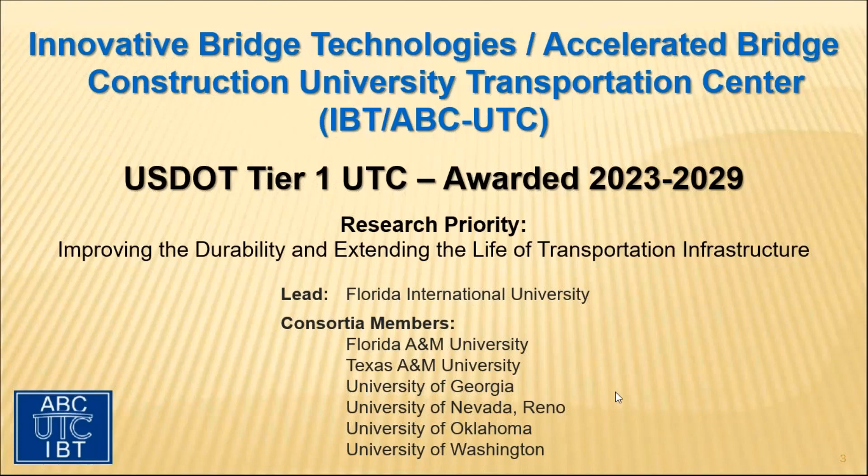As we've been discussing for the past few months, the ABC UTC will be transitioning to the IBT ABC UTC next month. FIU and our partners, as noted on this slide, have been awarded funding as a U.S. Department of Transportation Tier 1 University Transportation Center. With this transition, we'll be adding the IBT to our acronym to reflect our added focus on innovative bridge technologies. This is in addition to our focus on the accelerated bridge construction topics.

So what do we mean when we say innovative bridge technologies? Some examples are additive construction, such as 3D printing and automation, the next generation nature-inspired and advanced materials, also advanced information technologies, such as AI, ML, and AR. We'll also be delving into topics related to asset management and design specifications. Again, this is in addition to our ABC topics.

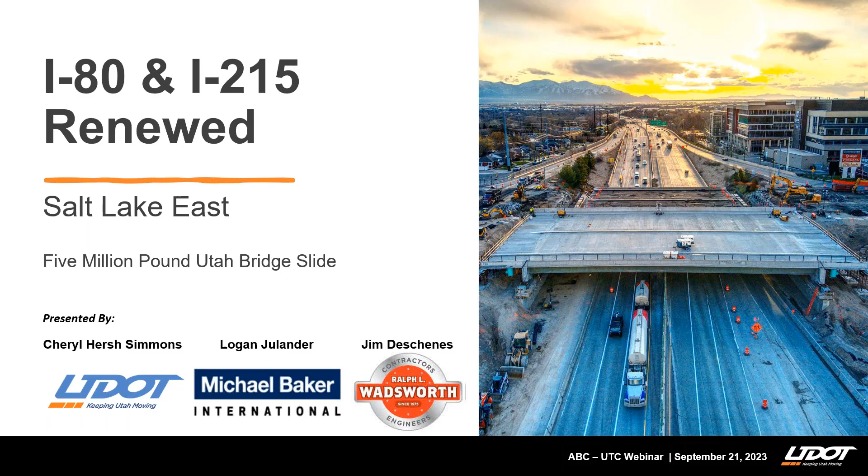Today, I'll start off by providing a high-level recap of Utah's Accelerated Bridge Construction Program history. Afterwards, I'll give an overview of the I-80 and I-215 renewed project and introduce the 5 million pound bridge. I'll then pass it over to Logan, who will focus on some of the critical design considerations, followed by Jim, who will dive into the construction details. We'll wrap up with lessons learned, followed by some time for Q&A.

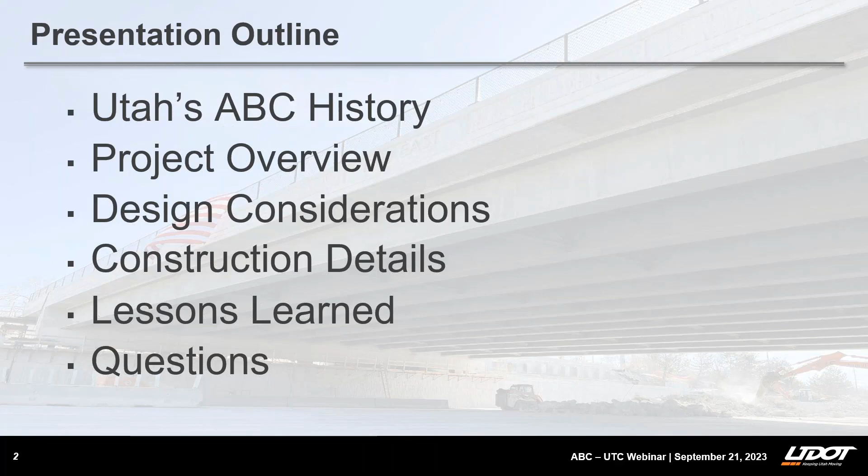So with that, I will kick it off by first starting with a little history. UDOT's first design build procurement was the $1.6 billion I-15 reconstruction of more than 16 miles of freeway and 142 bridges through the Salt Lake City metropolitan area in anticipation of the 2002 Winter Olympics.

It was vital that the project be completed before the games started, so the design build team chose several innovations new to Utah to accelerate construction, including the use of precast half-depth concrete deck panels and geofoam fill. The project was such a success, finishing both under budget and ahead of schedule, people started to ask why we don't do this all the time.

So, as a result, UDOT began research focused on innovations for accelerated project delivery. A portion of the research effort included scanning tours to investigate on a national level what other states were doing. In addition, a series of accelerated bridge construction workshops were conducted to engage industry, educate stakeholders, identify what was needed, and prioritize needs. In retrospect, the engagement of industry was a critical step to the success of the program and achieving the goal of having ABC as a standard practice.

It also led to a vision for a family of ABC methods and a plan for a programmatic implementation through pilot projects. Each pilot project set goals based on its specific scope and technology and provided strategic opportunities to gain experience. The first pilot project focused on prefabricated bridge elements and involved a bridge over I-80. The project was a deck replacement using full-depth precast concrete deck panels. It was designed internally by UDOT and constructed in 2003 using design bid build. The limitations of operations offered the contractor incentives and required the bridge to be opened in 7 days. The contractor received the full incentive.

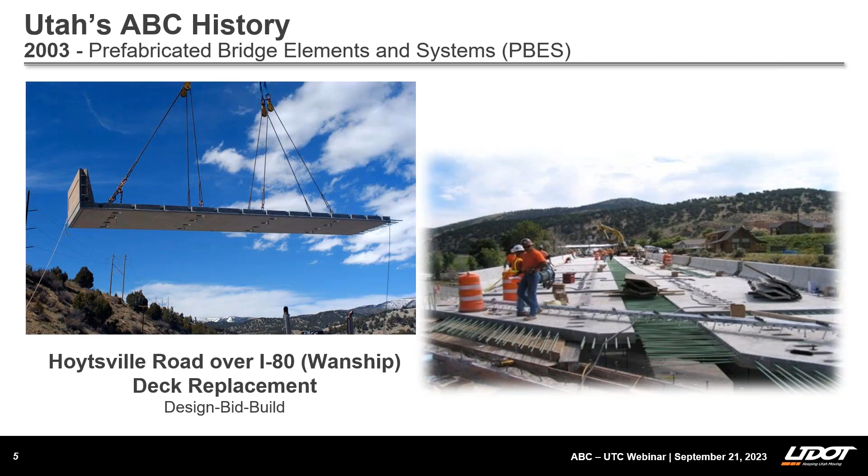In 2007, UDOT used self-propelled modular transporters for the first time to replace a bridge carrying 4500 South over I-215, not far from the project we'll be talking about today. Since the project involved a new technology, high risks, and a compressed schedule, a construction manager general contractor, or CMGC, contract was used to bring the designer and contractor together early in order to reduce risk and improve constructability. The bridge was replaced in 1 weekend. It took 7 hours to remove the 2 existing structures and 8 hours to place the new structure.

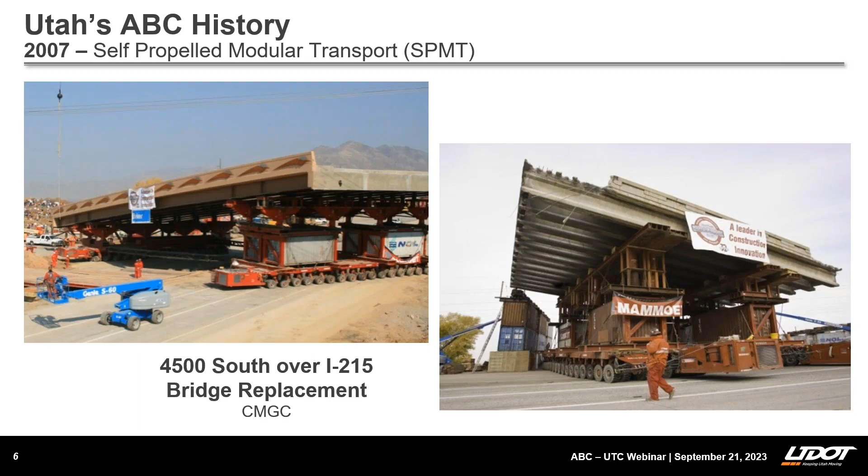In 2009, the bridge replacement for SR 66 over the Weber River was the first project specifying the new bridge be constructed parallel to the existing structure and then slid into place. The original design specified rollers, but the contractor performed a value engineering analysis and slid the bridge on Teflon pads with a hydraulic system. 30 days of closures were allowed in the contract. However, the contractor was able to complete the work in just 7 days.

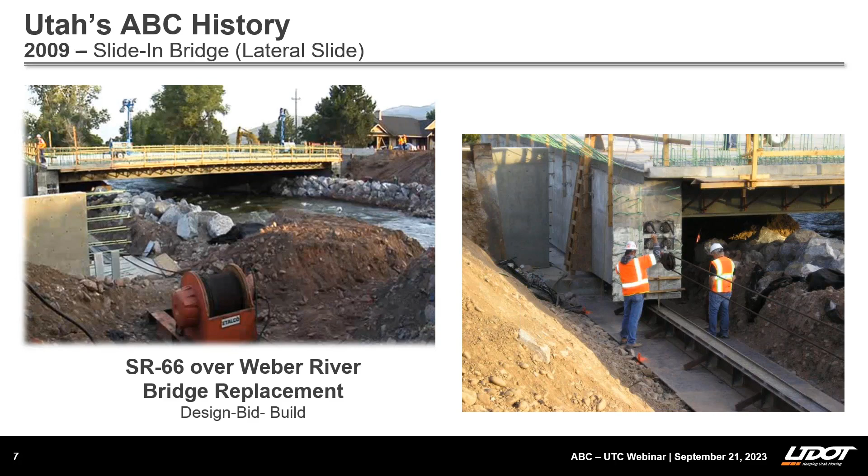We've established standards based on lessons learned and national research. We continue to evaluate performance and improve design criteria, design details, checklists, and construction specifications to give guidance and ensure consistency. This has been significant for designers, reviewers, construction inspectors, and contractors. With clear expectations, we are able to allow for innovations to meet site-specific goals.

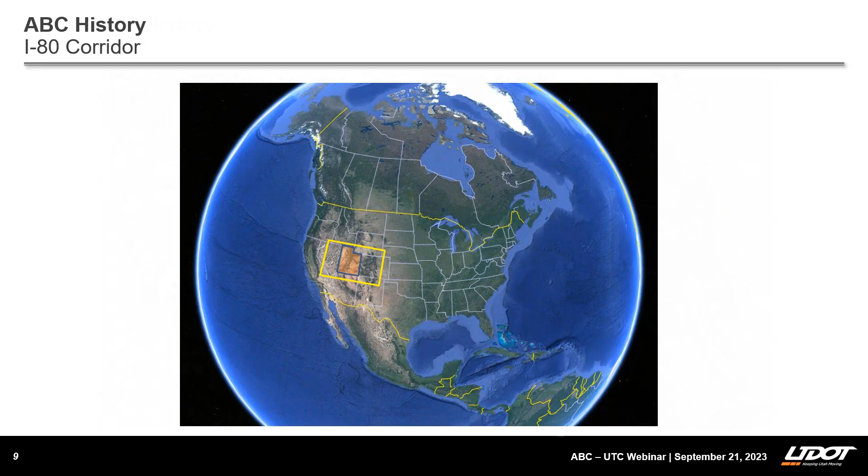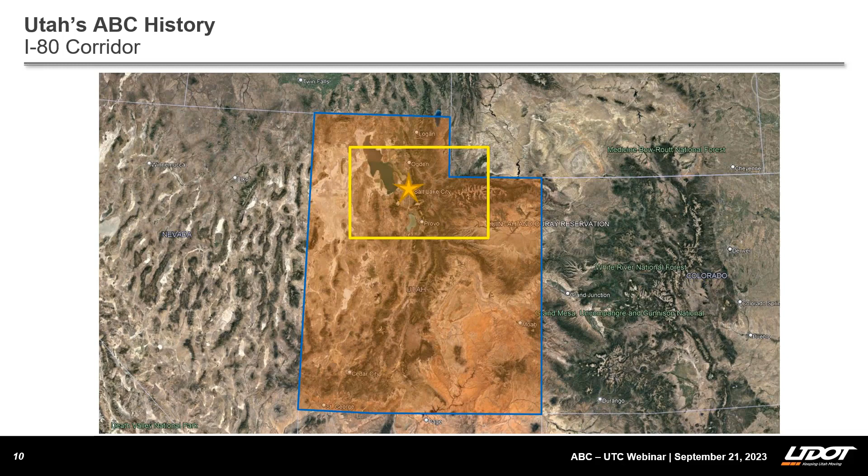Now I want to spend a minute getting everyone oriented. Here's a view of Utah, which sits in the western part of the United States. We'll be focusing on the northern part of the state near Utah's capital, Salt Lake City, which is designated by a star. A significant number of Utah's ABC projects, including some I've already mentioned, have been concentrated on I-80 and I-15, which provides a crossroads to the state. In addition, I-215 forms a belt loop with I-80 in the boxed area. The average annual daily traffic on these key economic corridors provides an obvious reason why minimizing disruptions to traffic is critical, and ABC is a popular solution.

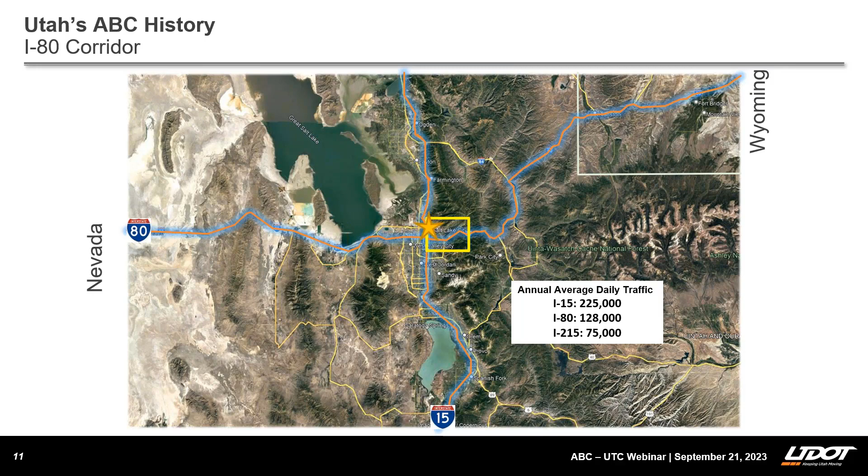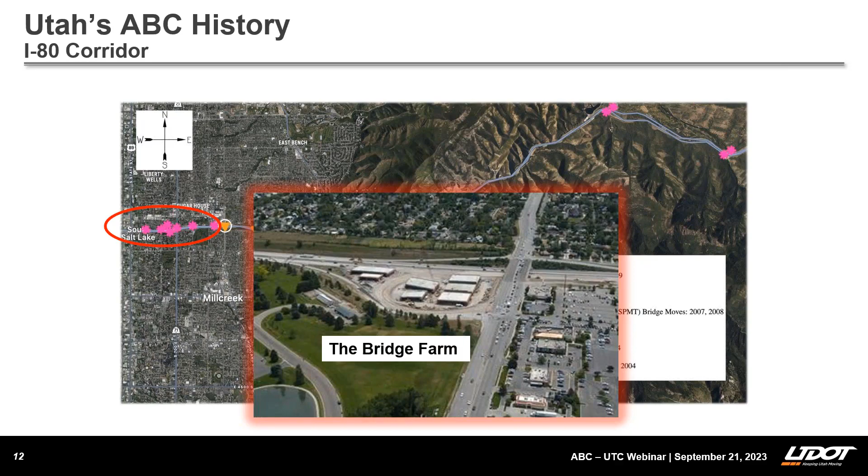Now let's take a closer look at the I-80 corridor near the junction with I-215. This slide shows some of the bridges in the area that have previously used ABC methods and elements, including lateral slides, SPMTs, and prefabricated bridge element systems. In fact, one of the more notable ABC projects happened in 2008. The project included 7 bridges that were moved into place using SPMTs. The space within the loop created by the 1300 East on-ramp to I-80 westbound was used for the construction of the bridge superstructures. It was coined the Bridge Farm. The I-80 and I-215 Renewed project we're discussing today begins just east of where that project ended.

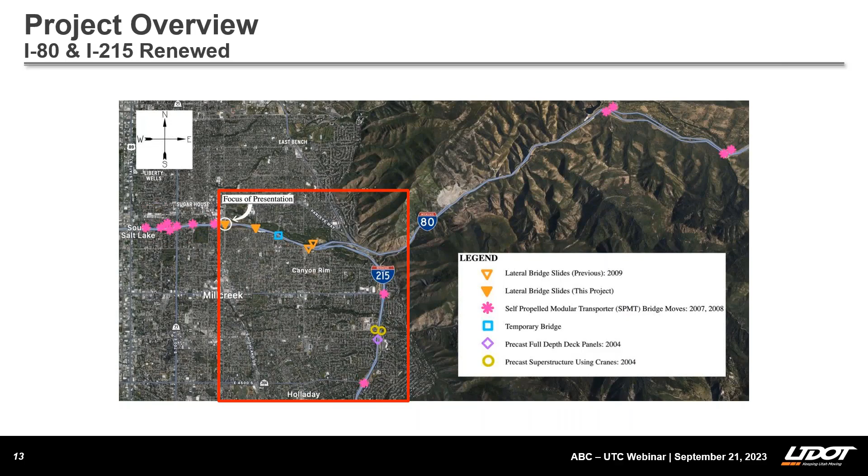This view of the project area shows the location of the 1300 East Bridge in the upper left corner in the white circle. It also highlights the key items of work for the project, including concrete pavement removal and reconstruction, a new eastbound lane on I-80, 4 replacement bridges, and 2 bridge widenings. The project value was over $120 million and used design build for project delivery.

One of the project goals was to maximize mobility during construction. The project used a best value selection with a combination of the proposal technical score and price. The proposer's schedule, user impacts, and road closures impacted the total. There was a maximum closure time allowed for each road with an associated cost per day.

For example, 1300 East allowed a maximum of 21 closure days with a cost of $100,000 per day for each full closure. On weekends, I-80 eastbound at 1700 East had a $150,000 cost per day for a full closure, with a maximum number of 12 off-peak closure days allowed.

The project was awarded in 2021, and the selected contractor proposed to use lateral slides for the replacements of both the 1300 East and 1700 East bridges over I-80, and a temporary bridge to facilitate phased replacement of the 2 bridges carrying I-80 over 2000 East. 1700 East was slid in 2022, and 1300 East was slid in April of this year.

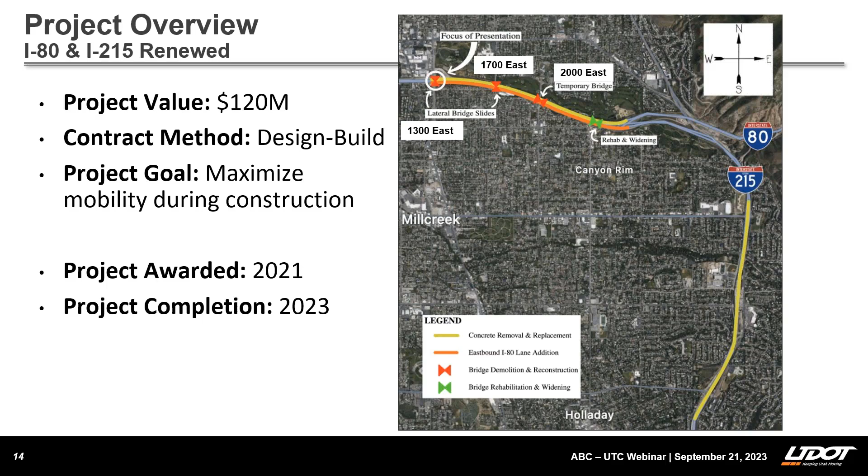The remainder of this presentation will focus on the 1300 East bridge replacement, otherwise known as the 5 million pound Utah Bridge Slide. So now we'll look at an elevation view of the 1300 East Bridge before replacement. It's a 4-span pre-stressed concrete girder structure that was constructed in 1964.

One thing to note is that UDOT has performed lateral slides with and without the approach slabs attached. For this project, the contractor opted to slide the 1300 East Bridge with its approach slabs. More details on this will be covered as we move on in the presentation.

Now, I'll turn it over to Logan. Hi, I'm Logan. I'll go over some of the design considerations for the 1300 East over I-80 bridge. The 1300 East Bridge was 125 foot wide by 173 foot long with 25 foot approach slabs. The bridge was slid with the 25 foot approach slabs attached.

The superstructure weighed approximately 5 million pounds, and some of the material choices that helped minimize that weight were steel plate girders and lightweight concrete deck, sidewalks, curbs, approach slabs, and end diaphragms. This was all supported on full height spread footing abutments.

This slide now shows the cross section of the bridge and just how wide it is. The 1300 East Bridge carries 3 northbound lanes and 2 southbound lanes with 2 turning lanes onto the I-80 on-ramp. There's a 6.5-foot sidewalk on one side and a 17-foot shared use path on the other.

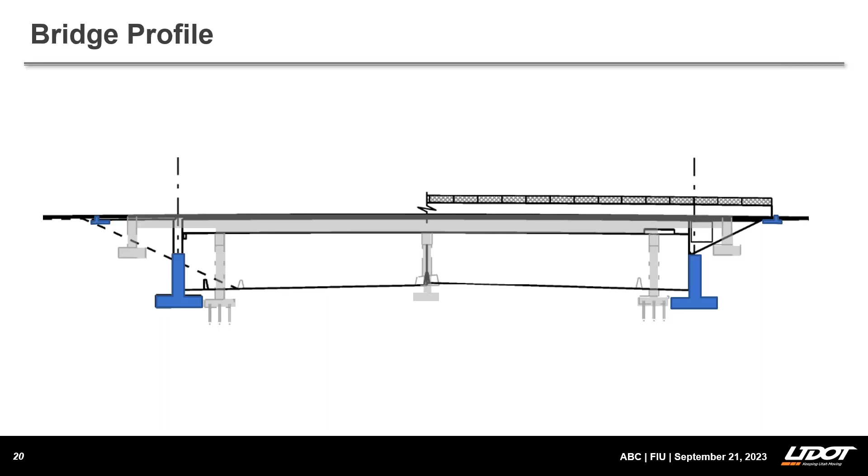The superstructure was slid on the abutment with the approach slabs connected, and the approach slabs were supported at the ends on transition elements that UDOT refers to as sleeper slabs. And I'll talk more about those later.

Now this shows the abutment in elevation with the temp support, and a common temporary support for bridge slides are driven piles with a top support beam at the slide plane, as shown here as an example. However, the temporary support for this bridge was essentially an extension of the abutment spread footing. The permanent abutment is shown in blue. Oops. And the temporary support is shown in orange. Having similar substructures reduced the risk for differential deflection between the permanent and temporary abutments.

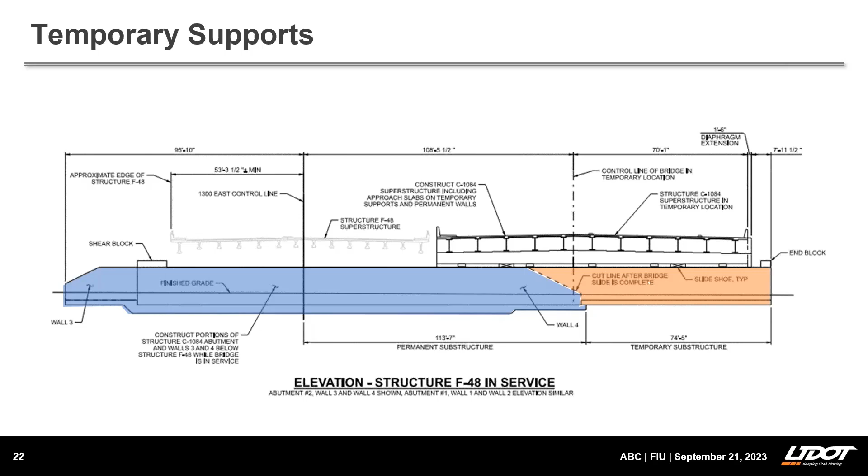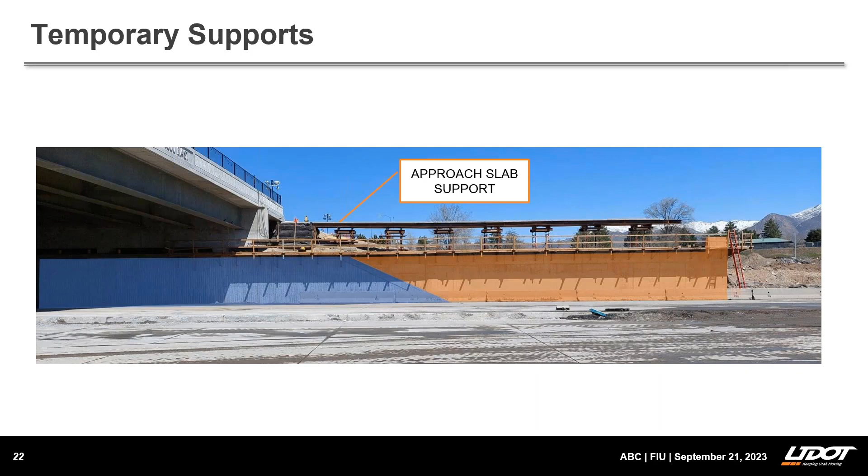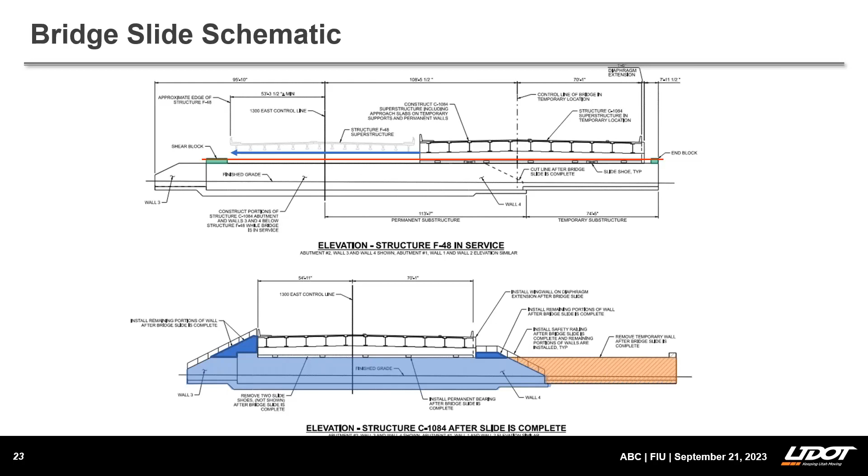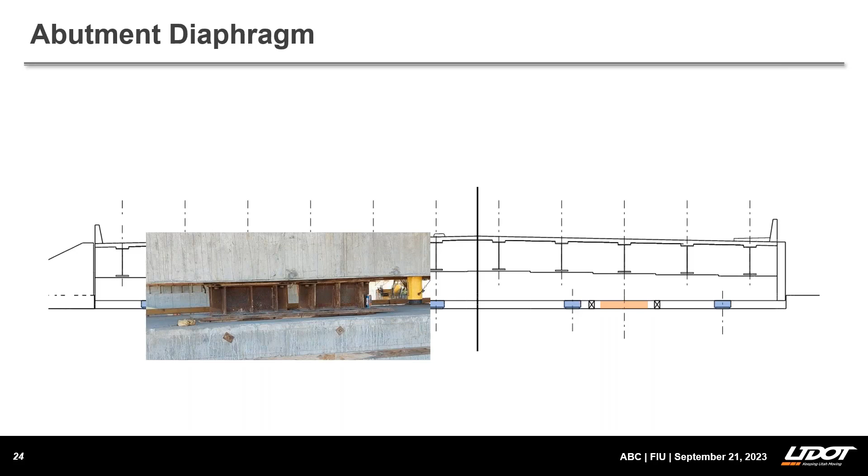Now, the abutment diaphragm was designed for different loading scenarios during the slide and in the final condition. The orange blocks indicate the slide or skid shoe locations that the bridge was supported on during the move, and this picture shows the slide shoe used for this bridge. The blue rectangles are the final bearing locations, and it was decided to use 2 slide shoe locations so that each shoe would have constant pressure during the bridge move, as opposed to several locations where you could have a shoe take more load than the others or have no load at all due to minor variation in the slide surface.

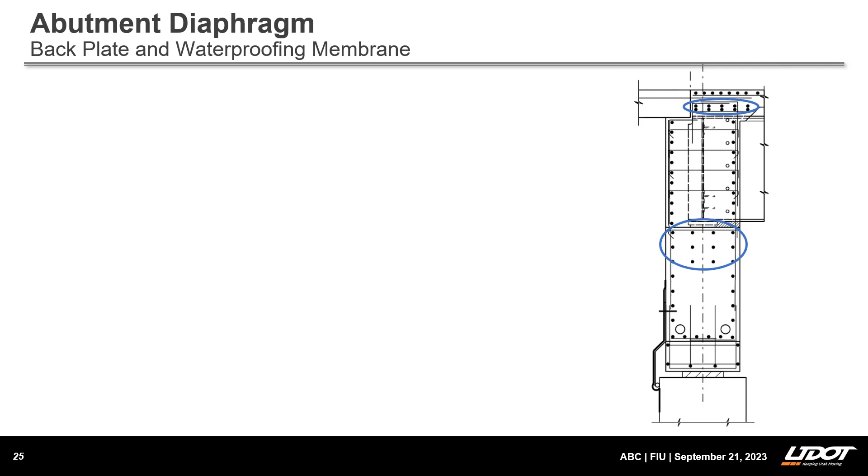This, however, placed the slide shoe locations 69 feet apart, which produced some large positive and negative moments in the end diaphragm. So the end diaphragm was essentially designed like a pier cap. This is another reason that the tall end diaphragm was helpful in design. And this section shows that 11-foot tall end diaphragm with the additional reinforcing below the girder and in the deck. You can see the 2 conduits that the threaded rods pass through highlighted in orange.

After the bridge slide, there was a 1-foot 6-inch gap between the top of the abutment stem and the bottom of the end diaphragms. The picture on the left shows that gap with the actual bridge. Now, in order to close this gap, a 3/16-inch bent plate was attached to the end diaphragm, as shown in green. This provided allowances for temperature movement and was sufficiently rigid to retain the lightweight cellular backfill.

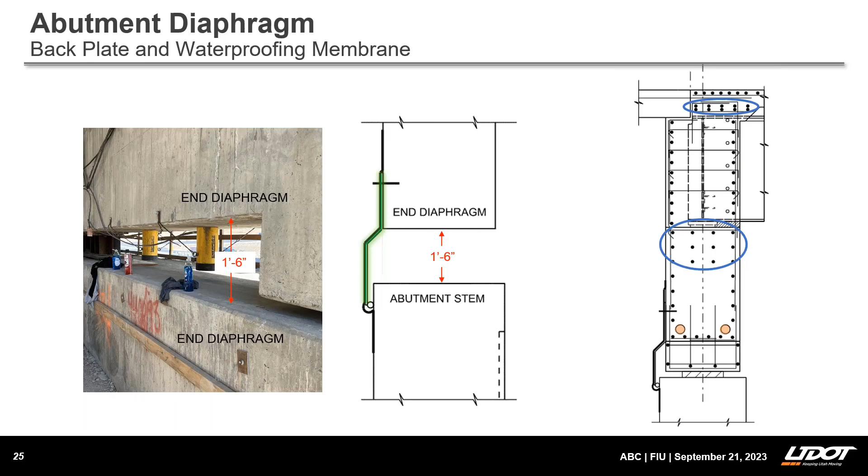So this provided 5 inches of clearance from the end of the approach slab to the post-installed stem bar reinforcing during the slide, and then approximately 1 inch of additional tolerance for setting the joint after the slide. Additional clear cover to the top reinforcement was provided to allow for grinding to account for any vertical differences.

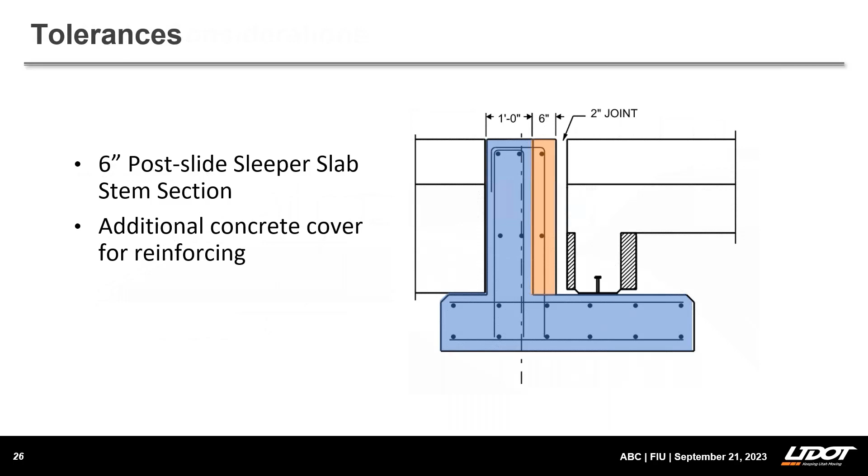Now, often bridge slides have unconventional details, but at the end of the day, we want the bridge to look like one homogeneous structure. It takes some forethought and design to help the bridge look aesthetically pleasing. A couple of aesthetics considerations for this bridge slide were the form liner, post-slide installed wing wall sections, and shear keys above the slide plane. Also incorporating a 7-foot by 7-foot city logo on a wing wall that could be seen from I-80 below.

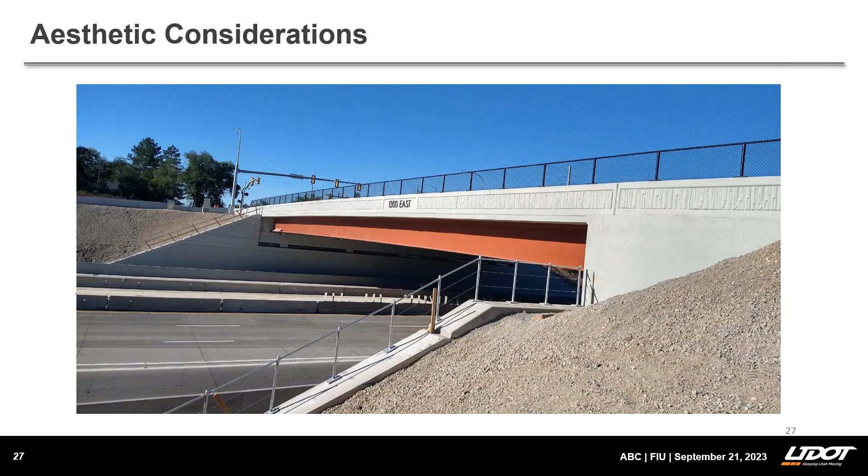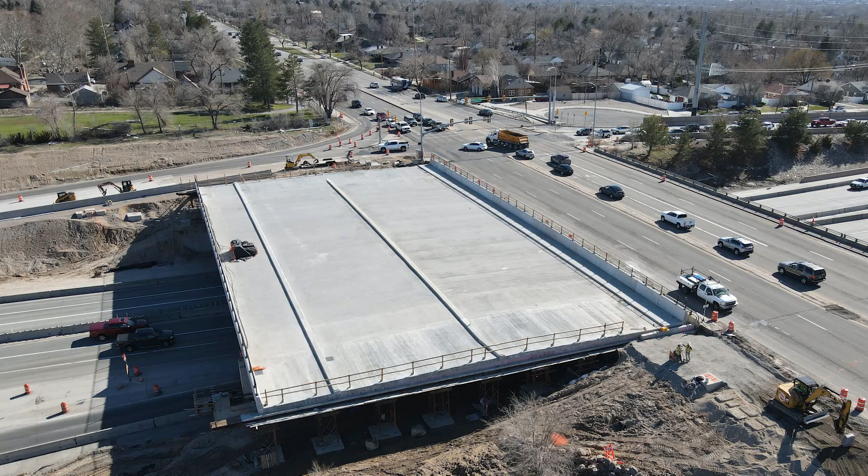My presentation is going to be focused around a time-lapse video of the 48 hours of the bridge slide itself. But I wanted to start out by saying the bridge slide was not the ultimate goal for the project. The goal for the project is really to provide a long-lasting maintenance-free bridge for UDOT. The purpose of using the slide was to replace an existing structure with the least impact to mobility as possible.

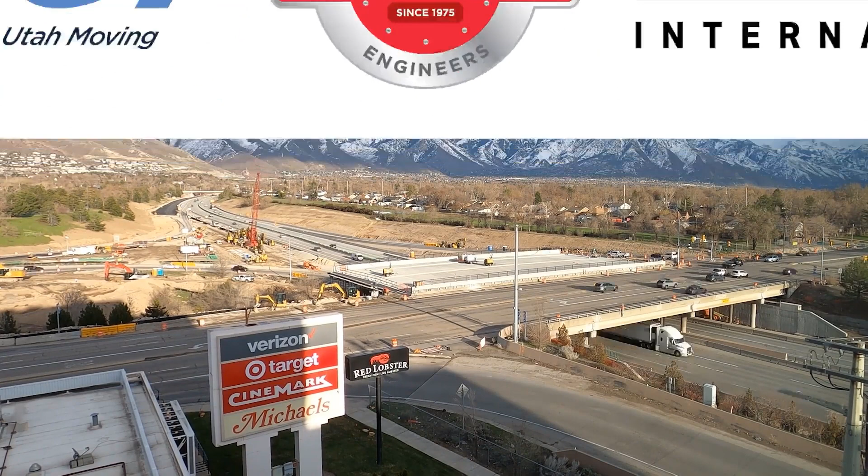That being said, there were a number of factors why a bridge slide made sense for our team in this location. One major factor is we've executed 10 similar bridge slides, most of them with UDOT and most of them with Michael Baker design engineers. That experience from all parties is critical in achieving the project goals and providing a high quality, low maintenance structure.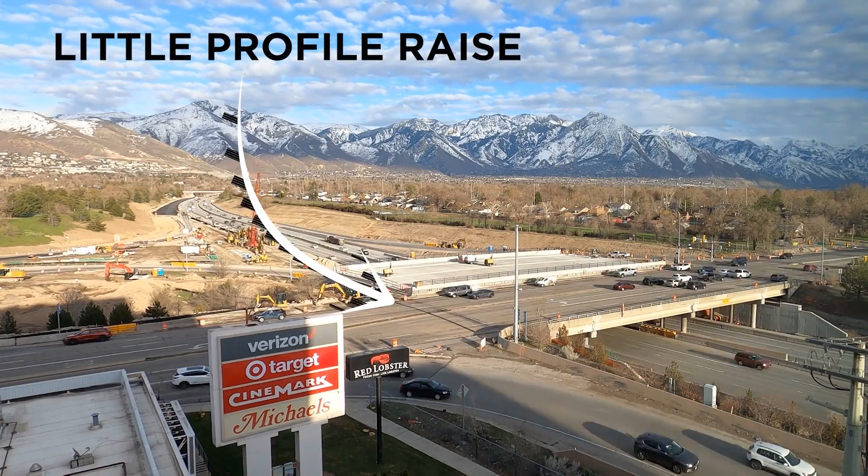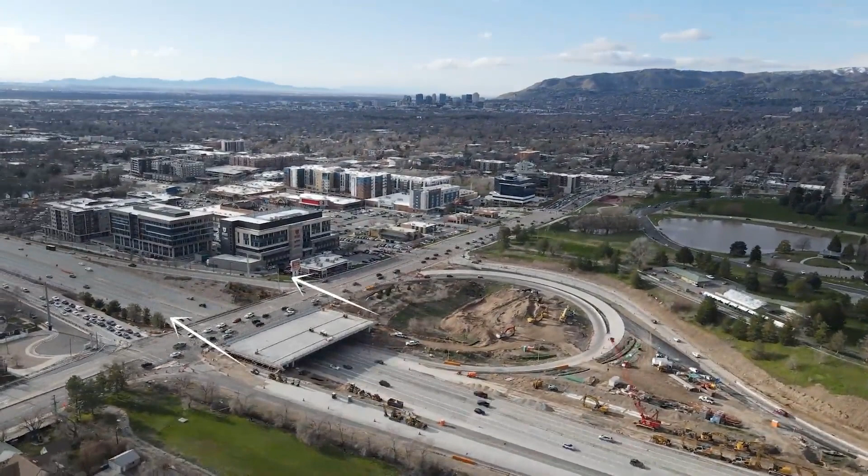Another factor is there was only a small profile raise from the existing roadway. Profile increases of more than 12 to 18 inches significantly impact the amount of roadway approach work that takes more time than the bridge slide itself. This bridge has basically zero skew. Let that catch up. Which made it really easy to control the alignment and design the slide system.

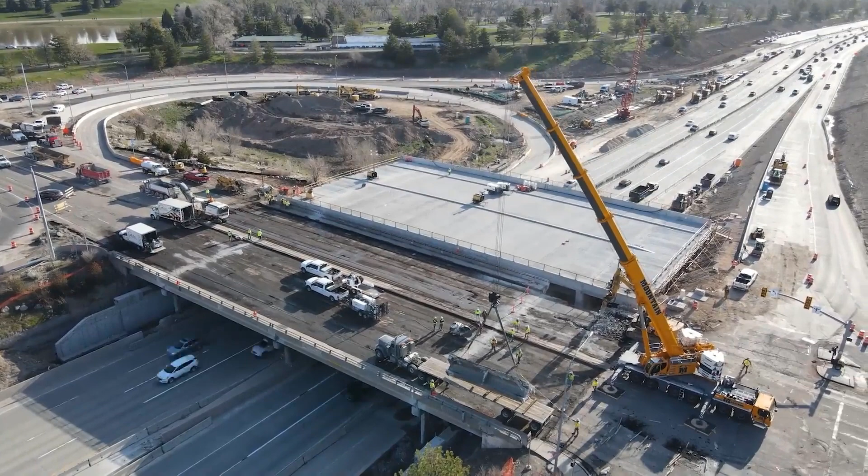Another factor is there's plenty of available space to build the bridge in a temporary location before executing the slide. Being able to build the bridge in a single phase in a temporary location has many advantages, including only closing the freeway for one night to set all girders instead of a multiple night closure for each traditional phase construction phase. Other advantages include no cold joints at the deck closure pours and an increase in safety for our crews as they are physically separated from traffic.

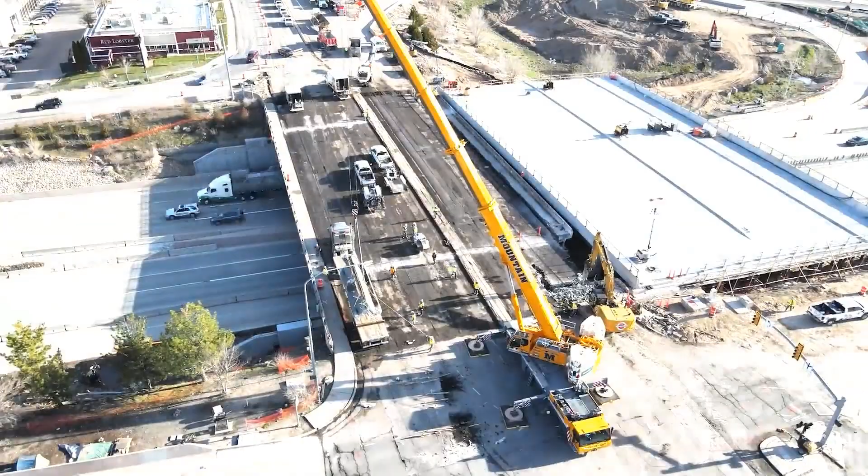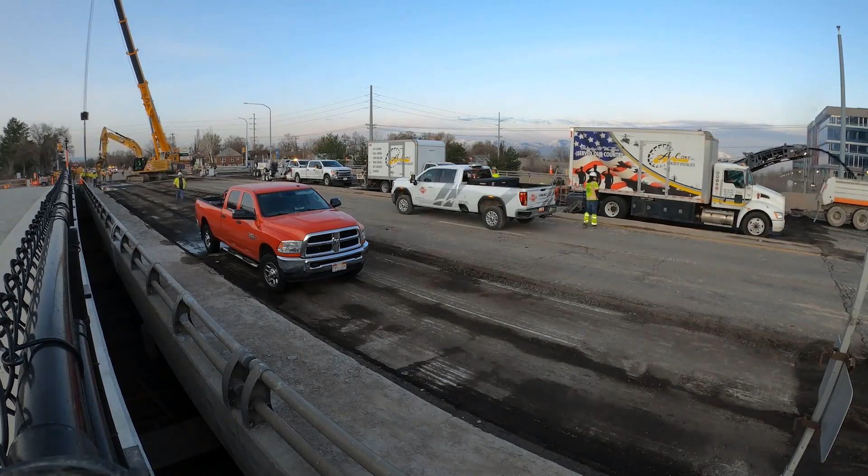A major task in any bridge slide is the demolition of the existing bridge. And as you can see, the new bridge was only 2 feet away from the existing bridge. The first step for this bridge was milling the existing overlays. This was done while freeway traffic was still open beneath the bridge. Milling allows us to recycle the asphalt and reduce the amount of material we have to process when the existing bridge is demolished in place.

For this existing 4-span bridge, we saw cut the deck and removed the end spans without closing the freeway. The end spans were short and relatively light. The large sections were hauled off to be processed in our yard, saving time to demolish these spans once the freeway was closed.

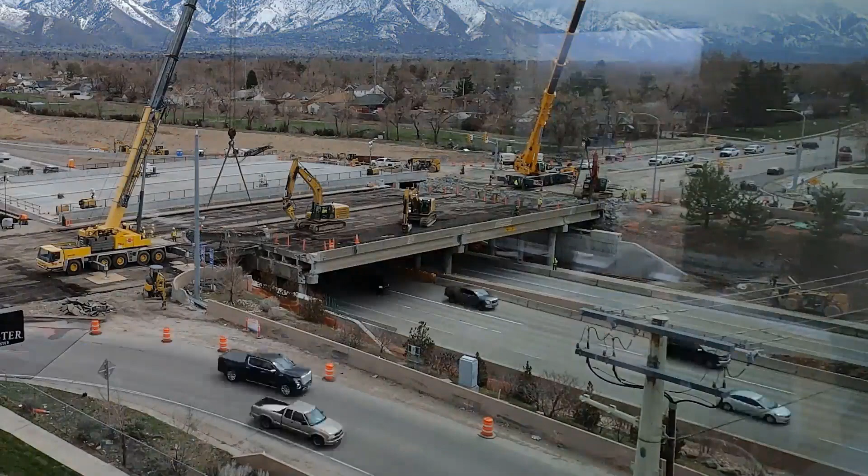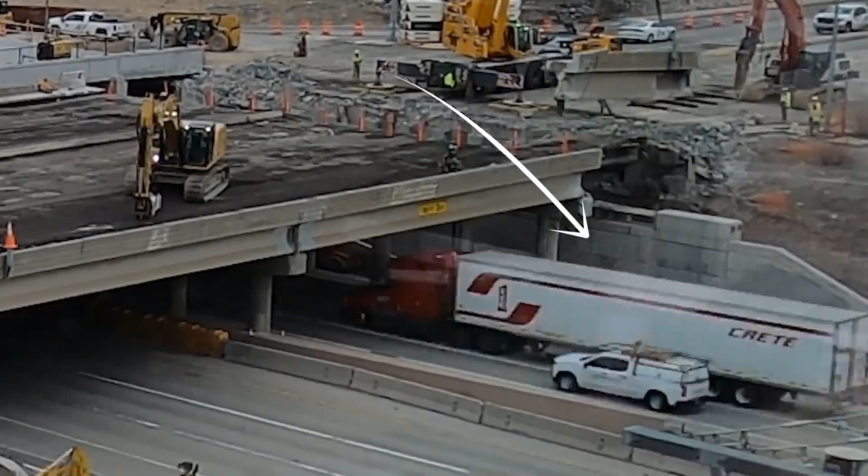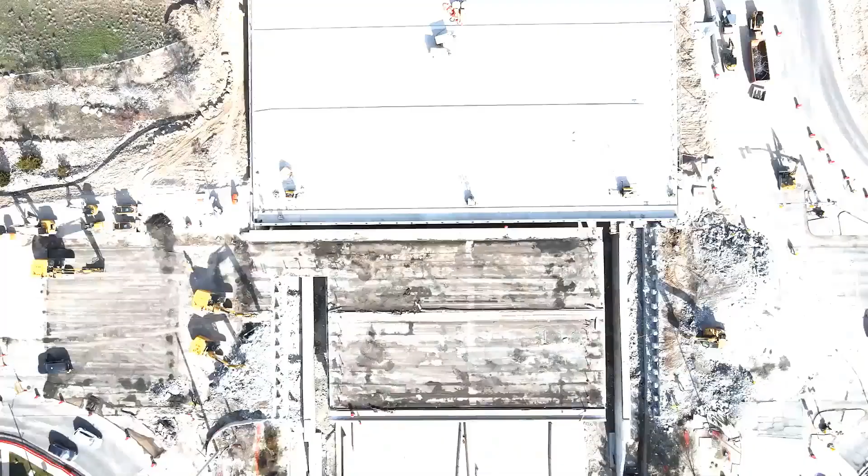A key component of the bridge slide is having space to build the new substructure under the existing bridge. In this case, the new abutment and slide surface was under the end spans of the existing bridge. A controlled removal of the end spans allowed us to prepare and protect our slide surface and install the post-tensioning rods we used to move the bridge before demolition was complete. As you can see in the video, we left one section of the end span in place to access the demolition of the main spans.

The analysis of the existing structure and the demolition plans were provided by RLW engineers. The actual demolition is one of the more action-packed nights of a bridge slide and makes for great video, but the reality is it's really a long night of noise and dust. We'll speed up through the demo here and use this opportunity to talk about our schedule.

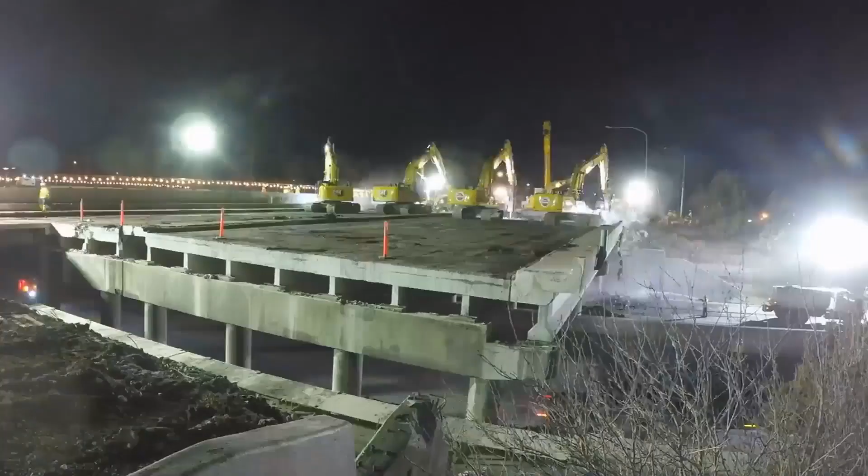Our planned schedule was to close 1300 East on Wednesday evening at 4 p.m. As we just saw, we started with overlay milling and the end span removals. We also started roadway approach work and drainage utility work. We closed I-80 in both directions on Friday night at 10 p.m. and began demolition of the main spans, the longest activity duration of the weekend.

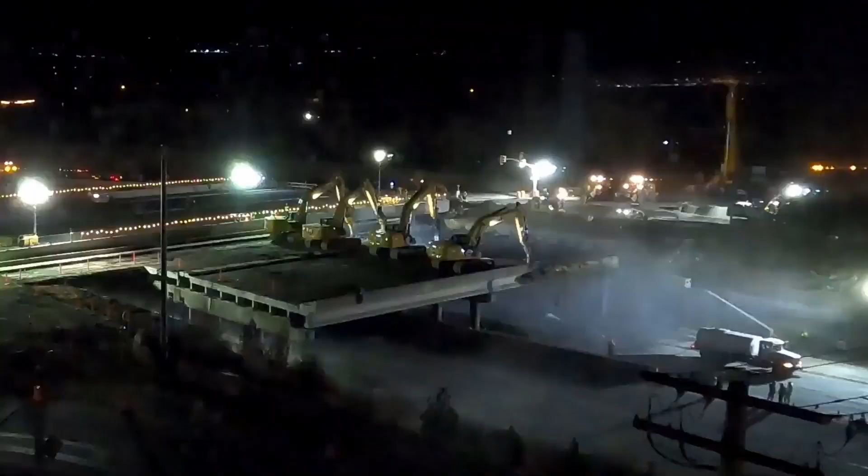The actual bridge slide was scheduled for 6 p.m. on Saturday and was planned for 10 hours to be completed by 4 a.m. Sunday morning. The remaining tasks were final cleanup of I-80, resetting the highway barrier, and a bridge inspection by UDOT before we opened the freeway to traffic. Conservatively, we had planned on an opening of Monday morning by 6 a.m.

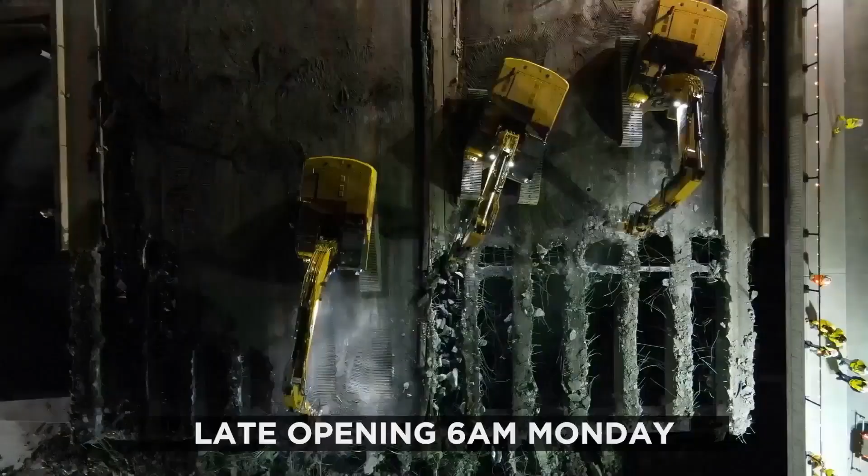We started the actual slide about an hour early at 5 p.m. on Saturday and finished in just under 7 hours. We were able to reset the barrier, do a partial inspection, and open I-80 by 3 p.m. on Sunday. The total freeway closure was just under 42 hours. Here at the end of the demolition, you can see that utility and roadway work is underway at the ends of the bridges.

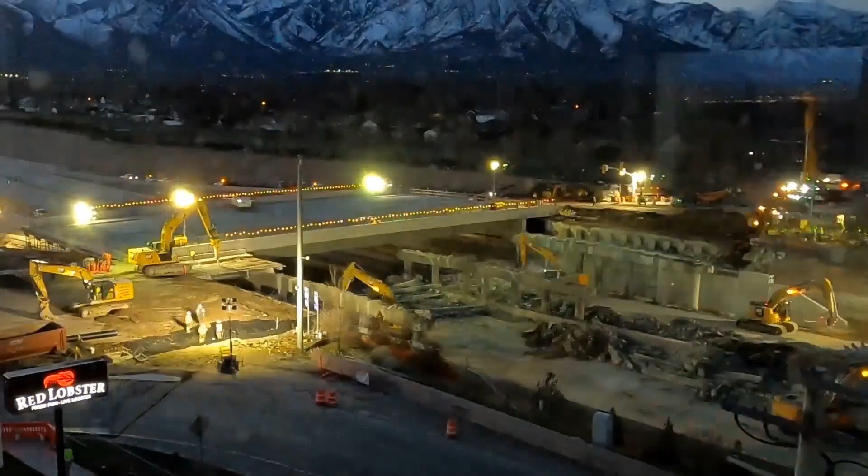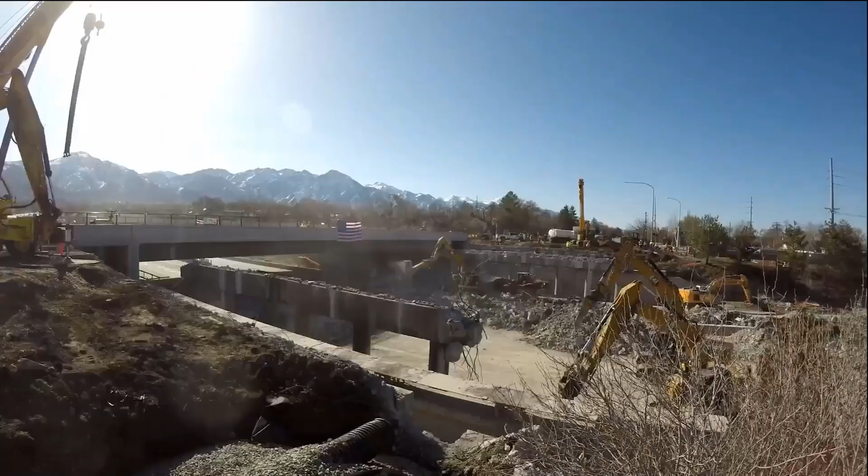Moving down to the freeway level, this view shows where the new abutment is constructed between the existing pier and the abutment of the existing bridge. And from this view on Saturday morning, you can see more of the elements critical to our bridge slide. From this angle, you can see the new abutment and its location between the existing pier and abutment, and you can also see the new abutment and slide surface being protected by timber and plywood as we finish the demolition.

One critical component of our bridge slide was sliding the approach slabs along with the bridge. UDOT uses sleeper slabs at the ends of the approach slabs as Logan described earlier. Therefore, before we slid the bridge, we had to set and level precast sleeper slab sections. Here we are setting the precast sleeper slab sections, which sets up our transition to the actual bridge move.

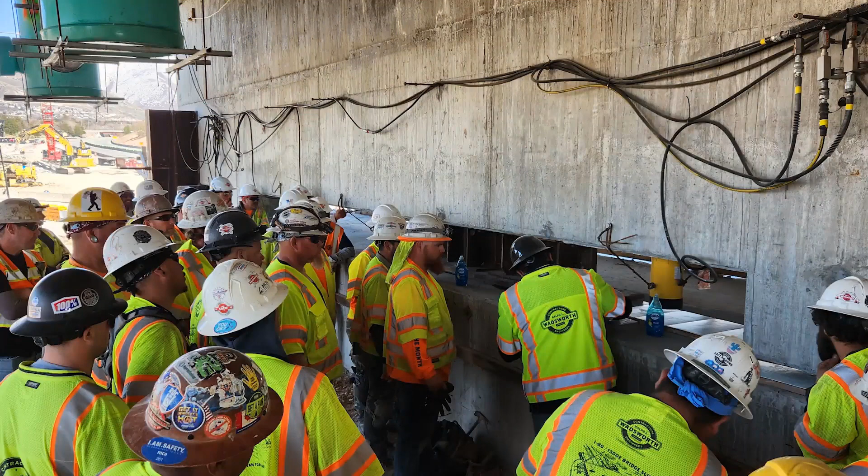We'll take a break from the video here to talk about some risk mitigation we implemented on the project. The first mitigation was having a number of pre-activity meetings. As you can see, we had a number of people involved and we had to coordinate our efforts. Some of our crews had been present during past bridge slides, but we really needed to get everyone clear on their roles and responsibilities for this particular slide.

Survey was also critical to a successful bridge slide. We performed multiple surveys of the slide surface, slide shoe elevations, and final pedestal elevations prior to sliding the bridge. We also performed deflection analysis of the end diaphragms as the support locations were different during the slide than they were in the final position. Although deflections were small, they were measurable, and we needed to have a complete picture of the as-built bridge pedestals and as-built abutment bearing location elevations to make sure that they would work with the final bearing pads to achieve the critical vertical tolerances.

Another aspect of the move, as you will see in a minute, is that when we were moving the bridge, the workers at the abutments placing the slide pads for the bridge and monitoring the progress are under the approach slab and out of sight of the jack operator who is up on the deck controlling the hydraulics. To overcome the line of sight and communication problems, we set up a series of video cameras and had a monitoring tent on the bridge.

As you can see in this photo, we had cameras at the leading edge of the bridge deck looking down at a survey stake and metal tape at the center line of the abutment. We also had cameras watching the hydraulic jacks. The hydraulic jack operator could watch the bridge move longitudinally and laterally with every stroke of the jack. This was critical to keep the bridge aligned during the move.

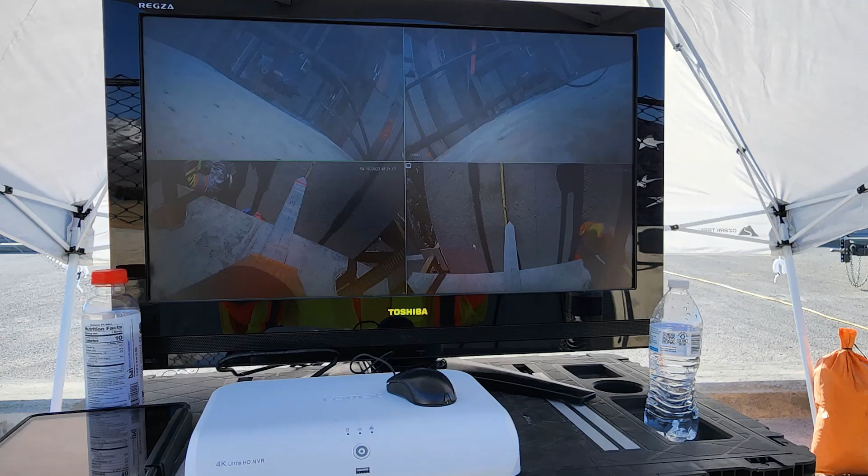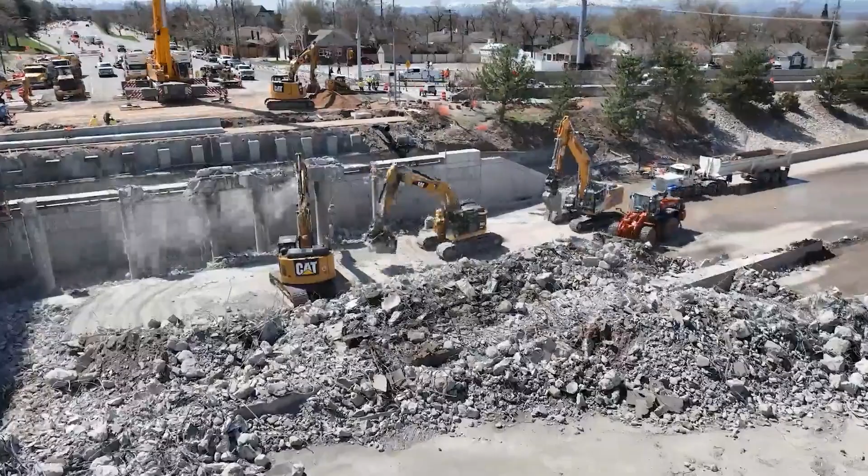Moving on to the actual bridge slide, we used two 200-ton hydraulic rams, one at each abutment. The bridge was slid on PTFE bearing pads lubricated with dish soap. Each abutment was slid on removable slide shoes. Once the bridge was in place, we lifted the bridge, removed the slide shoes, and set it down on the final bearing pedestals. Each abutment sits on laminated elastomeric bearing pads in 5 locations. To accelerate our schedule, we started moving the bridge before demolition and cleanup was complete.

One key aspect of our move was sliding the approach slabs with the bridge. One innovation we used to accomplish this was to use PVC catch basins that we could pre-install into the approach slabs. The lightweight allowed us to suspend them from the approach slab using typical pipe hanger hardware, which would not have been possible with concrete catch basins.

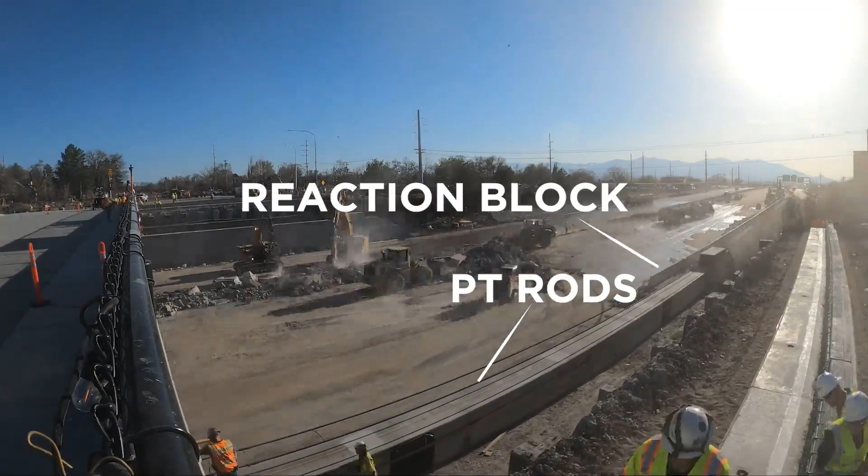In this view, you can see the camera attachment frame and survey stake at the leading edge of our abutment. You can also see the steel frame that served as our lateral steering guide for the bridge. I'll talk about that in a few minutes. As you'll see in these next portions of the video, the ends of the approach slab, the sleeper slabs, the reaction blocks, and the PT rods that were used to move the bridge.

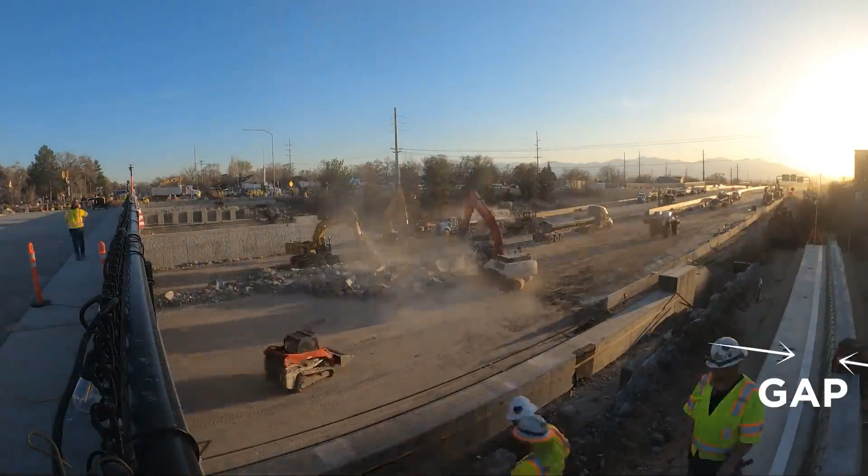The critical alignment area is between the approach slabs and the sleeper slab stem wall. It's critical to keep the gap constant and not bind the bridge against the stem wall. In this case, as Logan noted earlier, we created a larger gap during the slide by holding back the stem wall concrete. This provided an extra 2 inches of lateral tolerance during the slide.

This view is from the south abutment showing our leading edge survey stake along with the PT rods and reaction blocks we used to move the bridge. Moving under the bridge, you can get a good view of the reaction blocks and PT rods. As we pan around, you can see the permanent concrete pedestals on the abutment stem. These are where the final bridge is supported, but as shown earlier, they are not being used as supports during the slide.

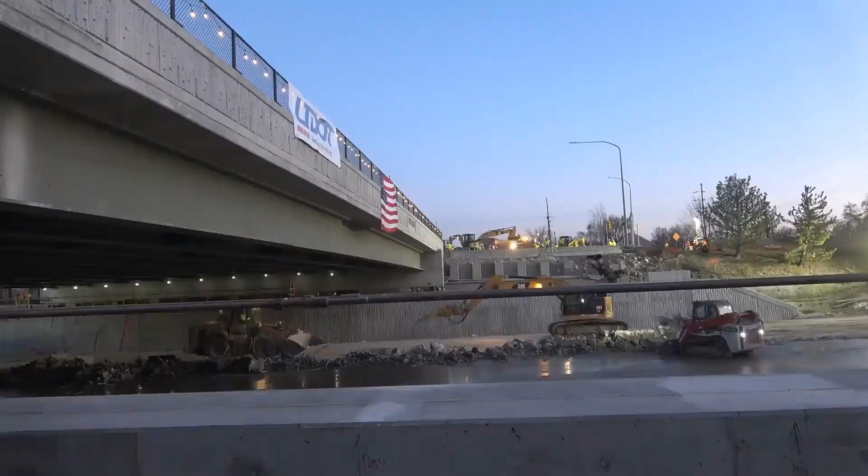Coming into view shortly here will be the leading edge and camera setup and a close-up view of the PT rods where they run into the abutment stem wall. The vertical steel section about to appear is the lateral steering guide.

Getting way ahead, the steering guide worked well in a few instances where we had to nudge the bridge back into alignment. The guide was not designed to jack the bridge laterally on its own, but rather to work in conjunction with the forward movement of the bridge to guide it back into alignment. Each steering guide had a small hydraulic jack mounted horizontally that could apply pressure to a slide pad mounted to the face of the abutment.

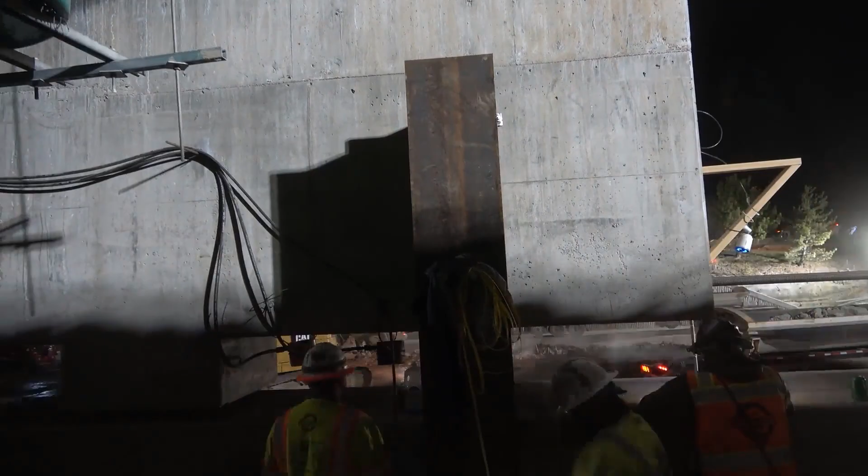By placing side pressure on the abutment, as we move forward, we could guide the bridge back into alignment. The analogy is pushing a car on a snowy road. It would take a lot of force just to push it laterally, but if you use the forward momentum, you can easily move it sideways with less lateral pressure.

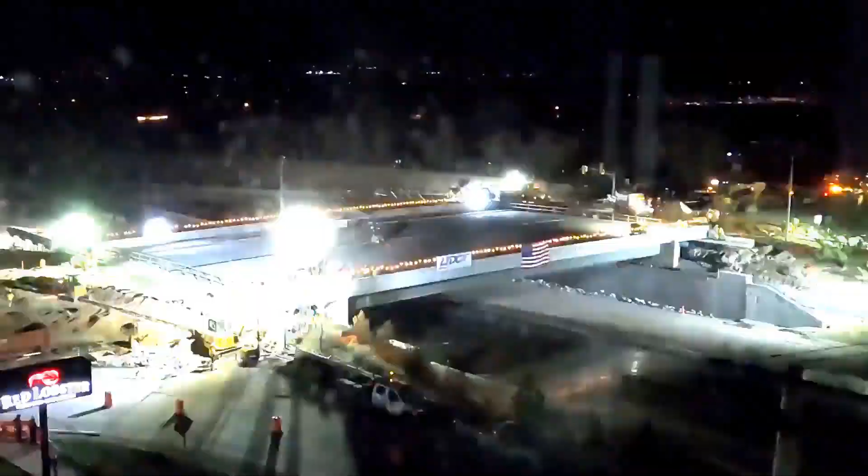As we work into Saturday night, you can see the gap between the approach slab and the sleeper slab gets a lot of attention at the end of the slide. Even with the additional joint space provided between the stem wall and approach slab, a 5-inch gap on a 125-foot wide, 175-foot long bridge looks pretty small.

This view from down below shows the end of the bridge slide early Sunday morning. You can see the concrete pedestals that support the bridge in its final position. The pigeons approved of the new steel girders with their wide flat bottom flange.

After sliding the bridge laterally for 108 feet, about 7 hours, the final position was within a 1/2 inch, both longitudinally and laterally, and within a 1/4 inch vertically. The freeway was open after a 42-hour closure. 1300 East was closed for an additional 3 days as we completed the roadway approach work and paving.

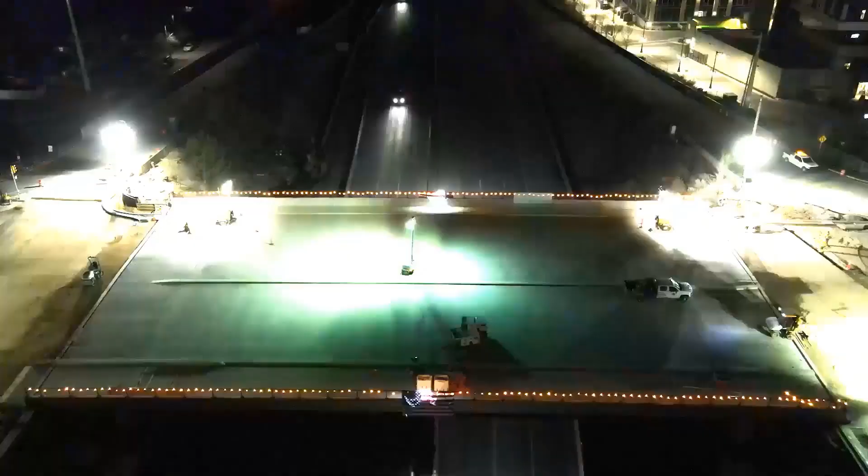This shows our backfilling and compaction efforts behind the sleeper slab stem wall. The even joint space between the stem wall and approach slab demonstrates our pre-work and planning resulted in a precise final location of the bridge.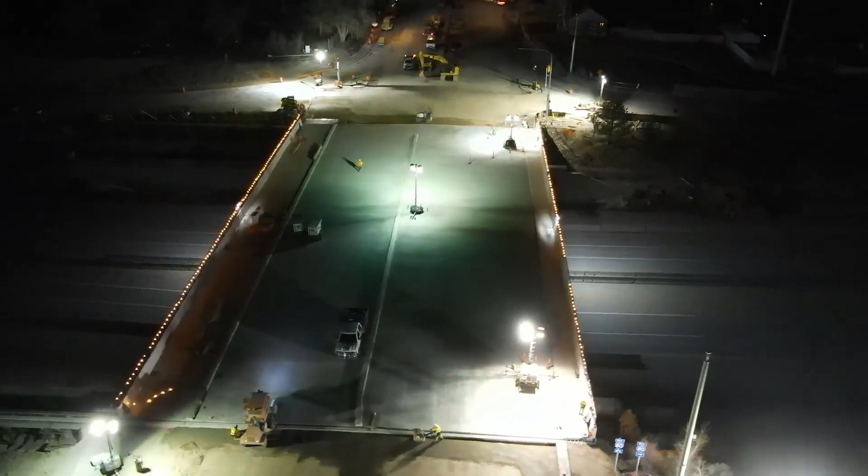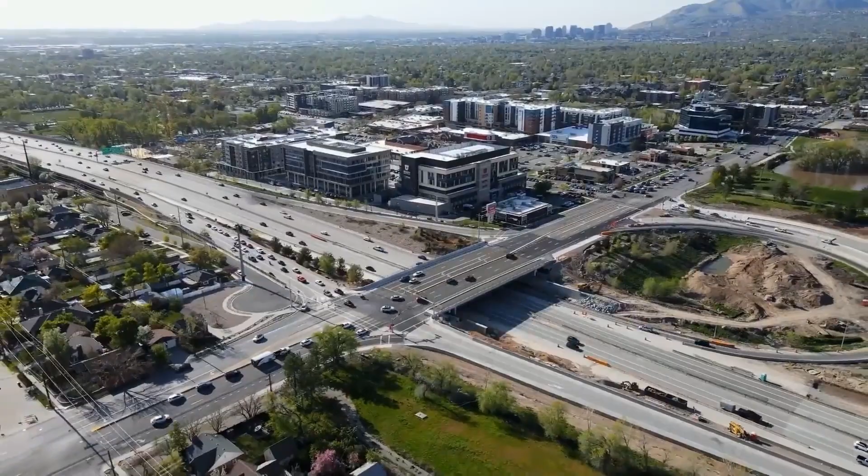The final closure stats for I-80 were 10 hours to set girders and the 42-hour bridge slide for a total of 52 hours or 3 days of off-peak closures. The original RFP allowed up to a maximum of 12 days of off-peak I-80 closures. 1300 East was closed for 6 days. The RFP allowed up to a 21-day full closure of 1300 East. The shorter durations made possible by using a bridge slide were a major reason for our best value selection on this project.

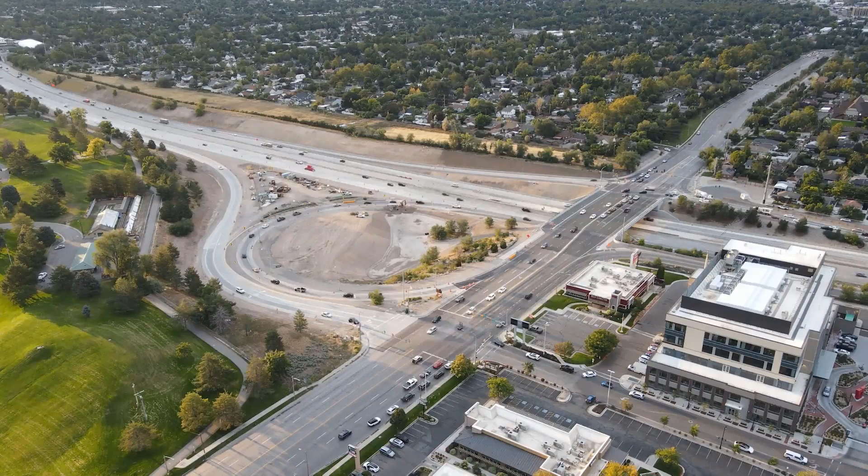And after the bridge was open, we still had to fill under the approach slabs and construct the final wing walls. We used cellular concrete to fill in beneath the approach slabs and around the PVC catch basins. This move was our heaviest slide to date and most critical in terms of mobility for one of the busiest sections of freeway and cross streets in Salt Lake City. There are a lot of details we didn't have time to cover, but I hope this gave everyone a good overview of how we were able to make this bridge slide a success.

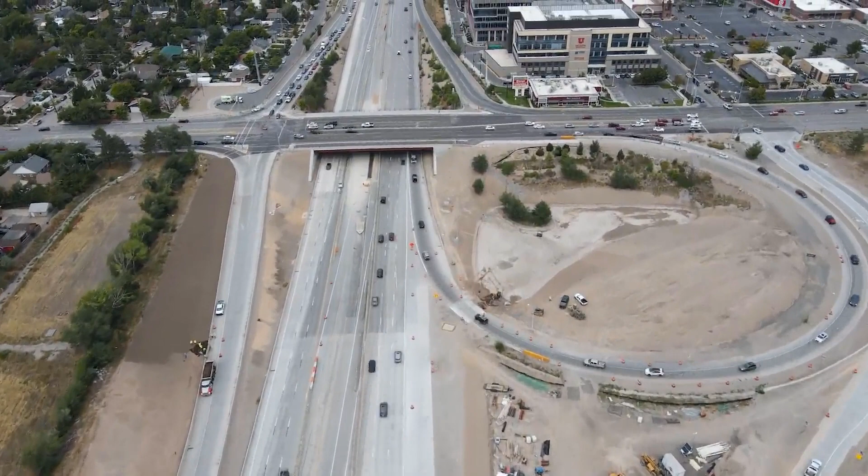Since the first bridge slide in 2009, UDOT designers and our builders have continued to develop and improve design criteria, design details, and construction specifications specific to bridge slides. And here in Utah, we're at the point now where a bridge slide is considered for just about every bridge replacement, regardless of the delivery method.

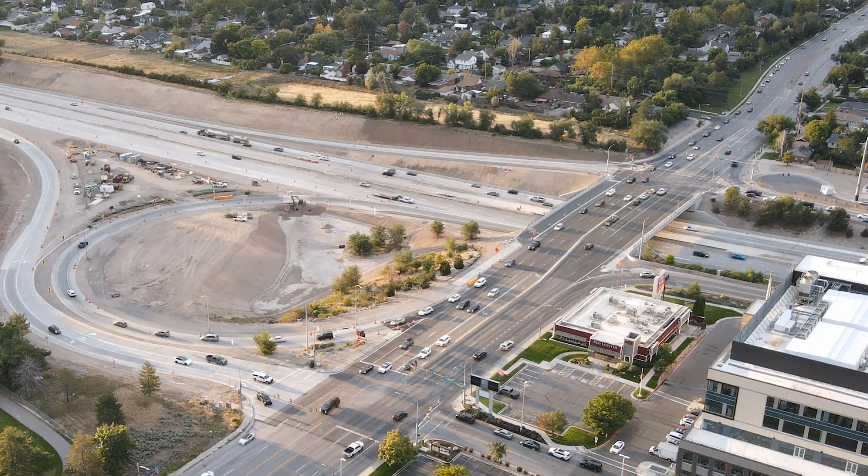I'll just go over a few of the lessons learned. So communication was key to the success of incorporating the slide elements into the design. And this project was design-build, so the designers worked directly with the contractor to plan how all the slide details could integrate with the structural details. Those key items being the temporary supports and slide method, either push or pull, and then adjusting those details to accommodate the different methods.

Now, if the project is a traditional or design-bid-build, the designer makes assumptions of the methods used for the bridge slide. So those assumptions need to be clearly conveyed within the contract documents so that the contractor can know what modifications to make based on their means and methods.

Also, for the bearings, communication was key, and there were several different bearing conditions during construction, during the slide, and in the final bridge location. Now, the final bearing locations were not under each girder line as is traditionally seen, and it was found helpful to design for additional construction tolerances than is required by AASHTO.

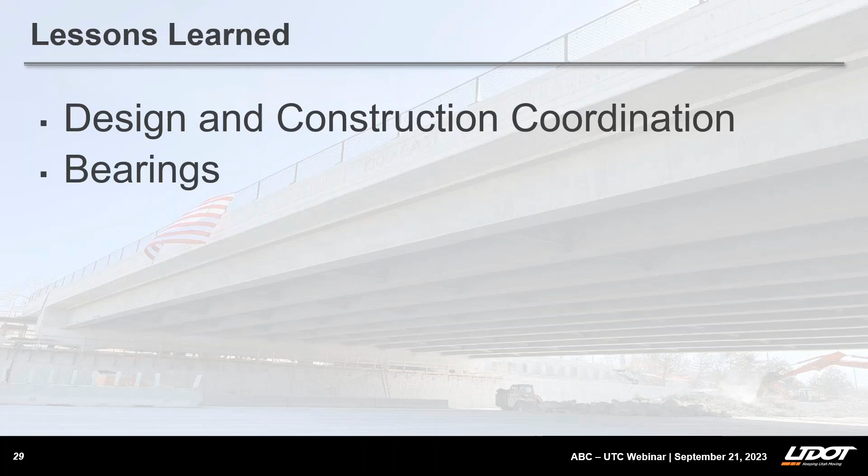On the construction side, a few lessons learned. One was there was a lot of talk about sliding the approach slabs. That hasn't necessarily been done on all of our slides, but it's highly recommended. There's challenges to be overcome to forming and placing and sliding the approach slab with the bridge, but the benefits of overcoming those challenges make it worthwhile. It's better for traffic and it's better for worker safety.

Survey and monitoring, again, I think really emphasizing to our crews that good craftsmanship and tolerances matter on a bridge slide is important. That's for finishers leveling bearing pad locations, carpenters building forms, and the surveyors getting accurate as-built measurements. There's fewer opportunities to correct issues through rework once a bridge has been slid into place.

So the extra attention to detail, the calculation of deflections, monitoring movement with each jack stroke, they were all keys to making the slide as accurate as it was. So I think survey and monitoring is a very, very important lesson learned on this project.

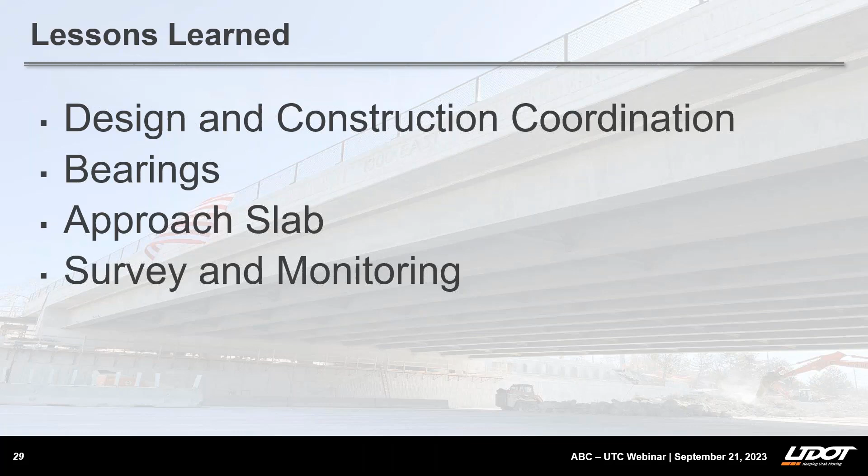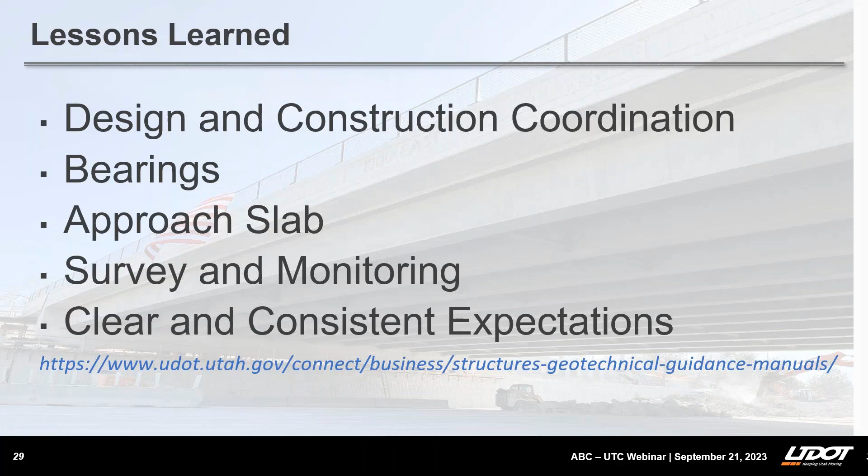And then I'm going to kind of navigate through. This is what that site looks like. And if you scroll down, you'll find the Accelerated Bridge Construction Information section. Within that section, we have inventory inspection reports, which document observed performance of various ABC details to help us improve performance; lessons learned reports, which document details from the early implementation; and project highlights, which provide project-specific information and photos on our past projects.

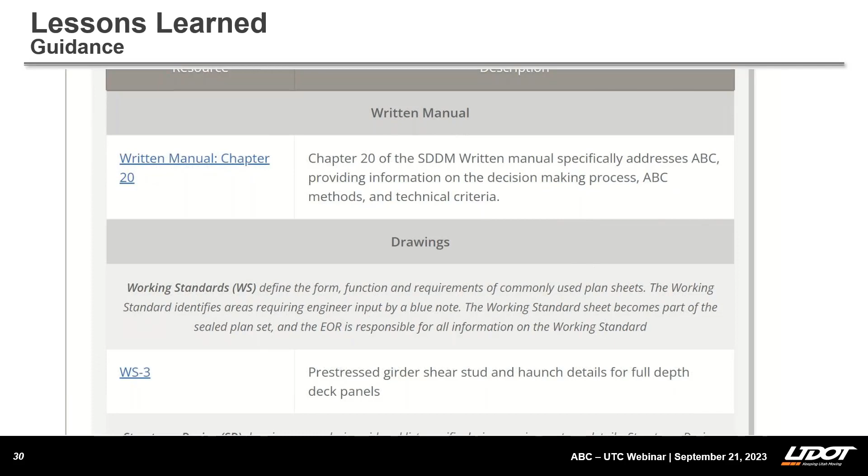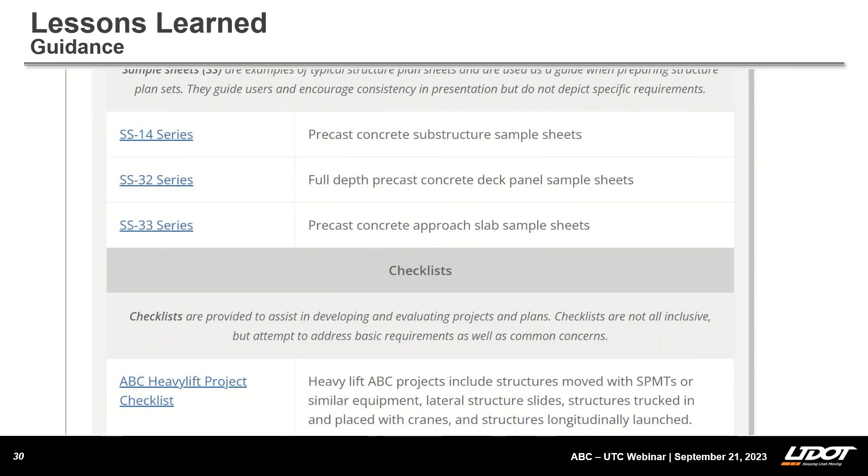And then if you go under resources, there are links to our ABC-related standards, including a chapter from our design manual, drawings, including some sample sheets, and checklists. Now, ABC, like Jim mentioned, is considered for every project, and the decision-making tools included in this section have a rating process and a flow chart for designers to use. In addition, we have construction specifications that support ABC, including a move bridge specification, which provides requirements for submittals, monitoring, and tolerances for each type of bridge move.

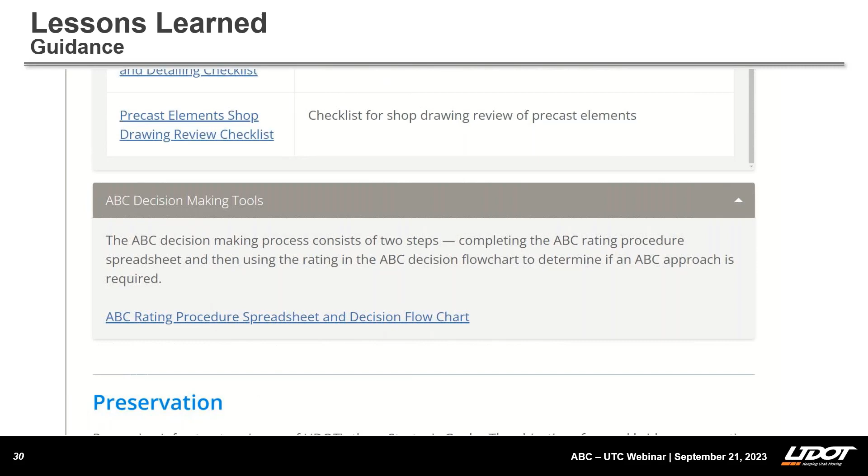Now with that, we complete our presentation and turn it over to Paul for questions. Thank you. Okay, well, thank you very much. Great presentation. Yes, the lessons learned and the resources you provide are extremely important, so thank you for presenting those. Okay, now we'll start with the Q&A session. Paul and Kathy. Paul, you want to get started? Okay, Mary Lou, thank you. Cheryl and Logan and Jim, really an interesting project and pretty impressive. We do have a lot of people here, and we're starting to get a bunch of questions.

I'm going to open up with one that came in before the presentation, but y'all really didn't get to see it. It's a new one for y'all, and it says, what was the governing criteria that were used to advance this bridge replacement as a lateral slide? And I'm going to turn that over to Jim from the contractor side of the design-build team.

Sure. This being design-build delivery, a major factor in our selection is overall best value, but the biggest component of that is cost. In this job, cost was divided into actual hard dollar cost, but also the lane closure cost that UDOT had provided. Cheryl mentioned the $100,000 a day, the $150,000 a day for various closures. So if you took the full 10 days on 1300 East at $100,000 a day, that's $1 million you had to add to your bid. If you could do it in just 4 days, that's only $400,000. So you're $600,000 ahead. That's the primary driver of using ABC on this project.

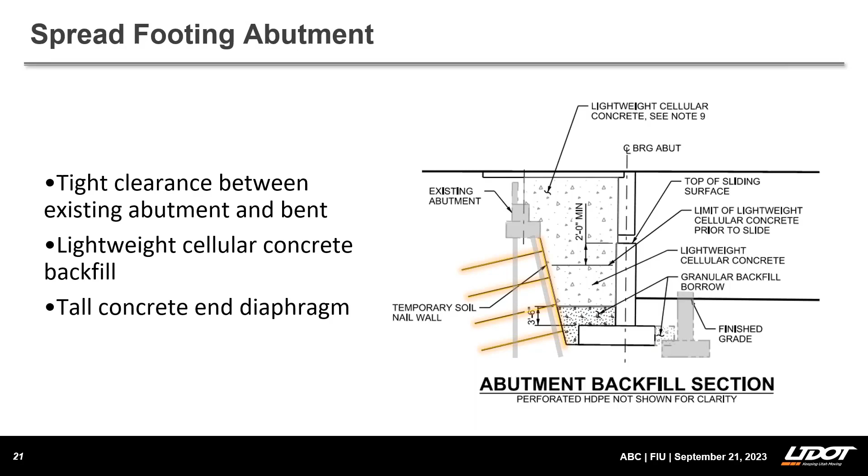There are a couple questions regarding the joint behind the end diaphragm and the abutment. I'm not sure if you can find the slide on that. If you look for that, I'll ask another question in the meantime. So can you comment on how the bearing locations under the diaphragm, rather than traditional bearings under girders, were considered for load transfer from super to substructure?

Yes, so that's a good question, and like I had mentioned, the end diaphragm was designed more like a pier cap, just because those bearing locations were different than the girder locations, and the depth of it also helped in that distribution of the girder and the superstructure loads over that 11 feet in order to distribute those out. And we placed the bearing locations so that it would be balanced in the final location for those superstructure loads.

Great. Okay, thank you for pulling up that slide. So the question related to that slide is, can you please describe a bit more about the cover at the joint between the end diaphragm and the abutment that protects the bearings from the backfill? Oh, okay. It was covered by that steel plate, and so there had been different ways in the past that we had covered up that joint, but the steel plate was a good, robust system that we feel like will last for the lifetime of the bridge.